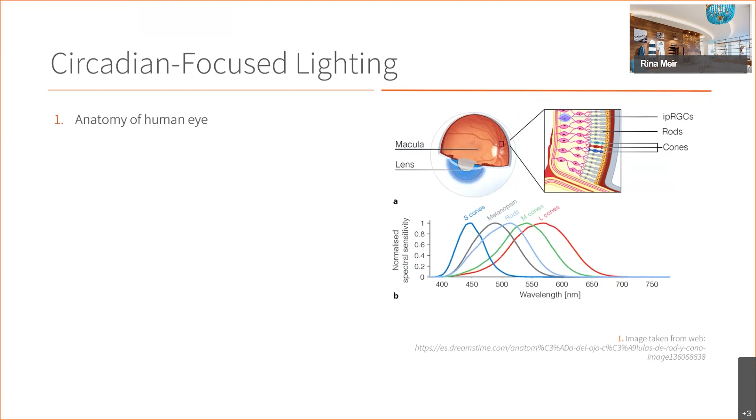They're found to be responsible for entrainment of circadian rhythm lighting.

The non-visual photoreceptors in our eye are more sensitive to specific wavelengths on the blue side of the visible spectrum. The blue turquoise light, essentially 456 to 490 nanometers, is more efficient to regulate circadian rhythm lighting. Blue-violet light, which is 415 to 455, medical researchers show that blue turquoise light may be less damaging than blue-violet light, which brings on age-related macular degeneration and digital eye strain.

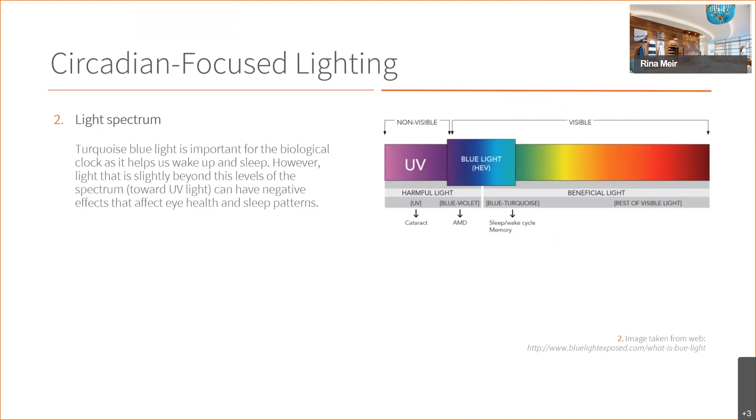So, flicker. Flicker is one of the most common problems we encounter nowadays, specifically due to the LED era. I'm sure you've all seen flicker-related situations in the past, and it's a big problem that depends on a wide variety of factors.

Generally, the three main ones to be considered are the power supply and the quality of the power supply, the compatibility of the fixture with the driver or power supply, and the compatibility with additional accessories like heat sinks and whatnot.

It's important to touch base on a key flicker factor: the power we get from an outlet, which is AC, or alternating current, with an incandescent source. The resistance of the filament made it almost impossible to notice flicker in the past. It sort of acted as a buffer.

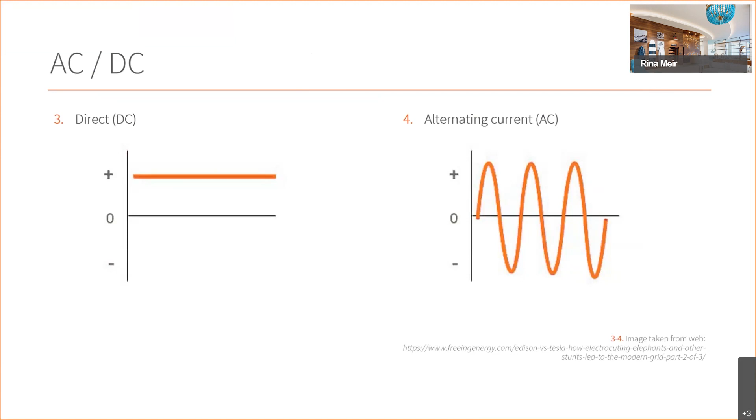So this is the age-old conversation about direct current versus alternating current, low voltage versus line voltage. Do I want ease of install, or do I want perfect dimming? Or not just perfect dimming, but a flicker-free environment under every circumstance? This is the obvious question lighting designers have to think about when designing spaces for any application.

Some of the most common health-related problems with flicker, which are minor but become very annoying, are headaches, eye strain, and fatigue. The question is how to know when there's flicker, and the answer is: anything blinking over 100 hertz our eye will not perceive as flicker, while standards accept up to 90 hertz.

The banding effect occurs when the light source turning on or off is in synchrony with the frame rate of your camera. But there's a trick: you need to know the frequency of your camera taking photographs, or the video frame rate. The most practical test is to flick something like a ruler in front of the light source. If you see a strobing effect, the flicker is probably below 100 hertz and will be visible. On the other hand, if you see the object move without the strobe effect, the light source is probably flicker-free.

Some of the health effects associated with this: there's the obvious stuff, like blurred vision and eye strain. It's not that big of a deal in most circumstances, but it's very annoying. It can become very dangerous in a driving situation. Headaches, migraines, fatigue, and reduced visual task performance can also be quite serious.

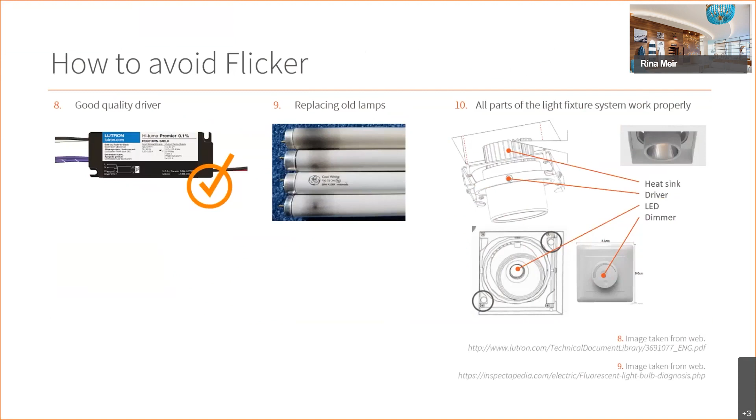Now we're moving on to different ratings—this is how glare is measured. There are essentially 2 different terminologies: one is called VCP, or Visual Comfort Probability, and the other is UGR, Unified Glare Rating. Because we're American, we always like to have our own ratings.

VCP is generally used in the United States, but if you're looking at specifications for lighting products that are global brands, you'll find the UGR rating instead. These are just 2 different rating systems, but they tell the same story. If you Google VCP to UGR, you can find how to decipher between the two—you can take the value of a product in VCP and translate it to UGR and vice versa. The one I think is probably most important is the Unified Glare Rating.

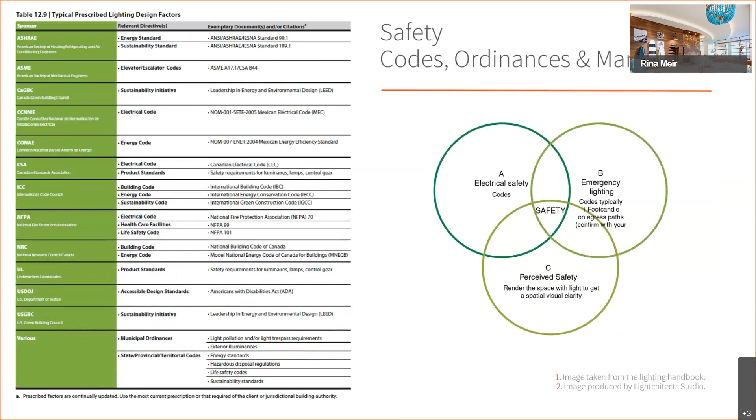The IES handbook provides lighting recommendations. There's also ASHRAE, IES, and you also have to consider your local, regional, and federal codes as well.

But they all are important. What is IES again? IES is International Electrical Standards, I believe. Oh no, sorry, I take that back. It's Illuminating Engineering Society. If you want, I can show you, I have all their books here. But they're massive, it's like a 5,000 page giant book that they give out, I think every year it comes out.

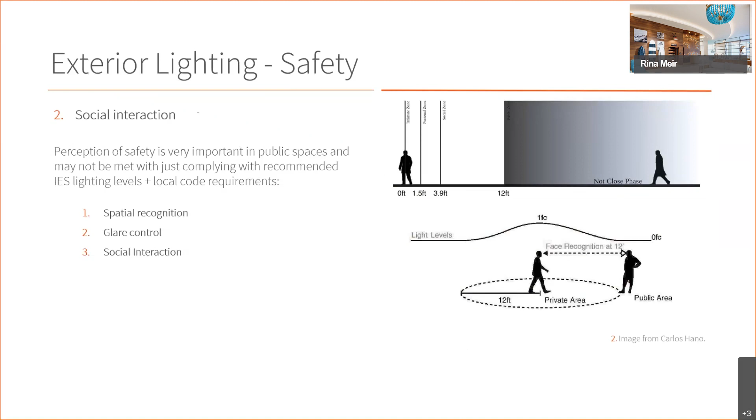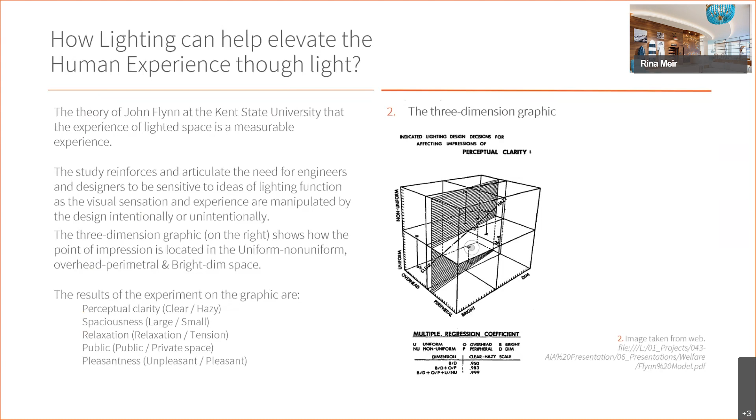There's a theory from John Flynn at Kent State University that experience of lighted spaces is a measurable experience. This study reinforces the need for engineers and designers to be sensitive to lighting functions, as the visual sensation and experiences are manipulated by the design, intentionally or unintentionally. The three-dimensional graphic shows how the point of impression is located in uniform, non-uniform, overhead, perimeter, and bright, dim spaces.

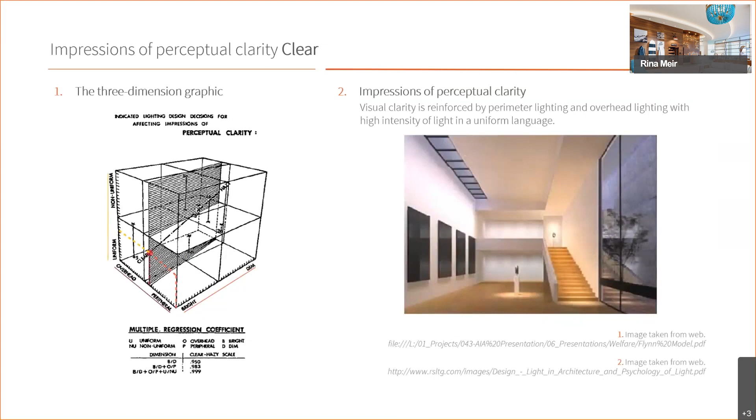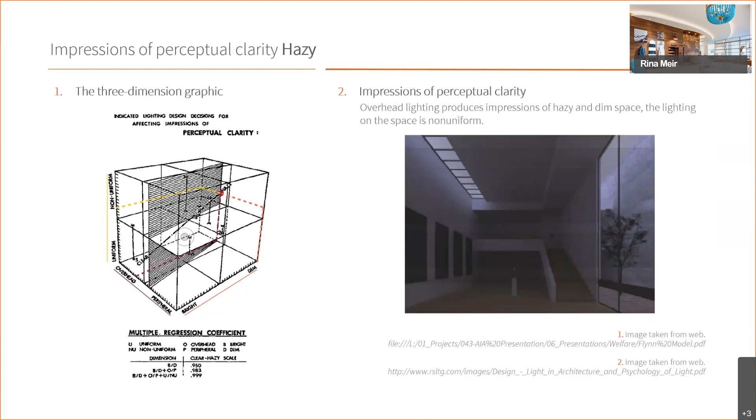Then you've got the next, which is hazy, which is again the perception of the space achieved by non-uniform lighting, mostly overhead, and it's dim, and it's rendered hard to sort of understand what we're looking at.

Then you've got the creation of a larger space, which we talked about a little earlier, essentially lighting one of the back walls, which gives you the feeling that the space is much larger. It's mostly bright and mostly uniform.

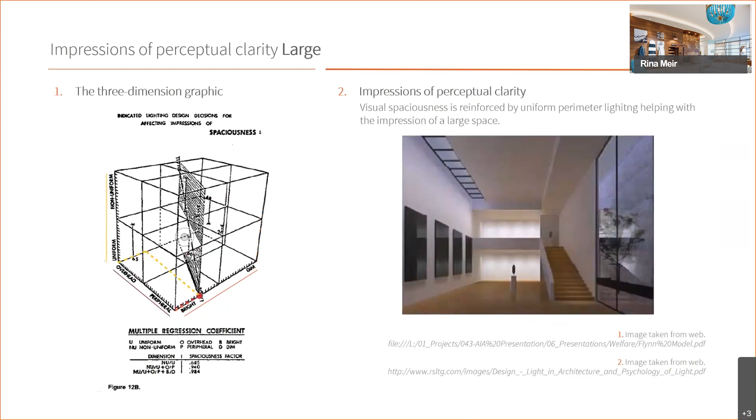And then this is a small space, so now you're creating the feeling of a small space: non-uniform lighting, overhead lighting, mostly dim, high contrast, lack of illumination. This is what we call theatrical lighting, where you've got a very high contrast of your dark to your light.

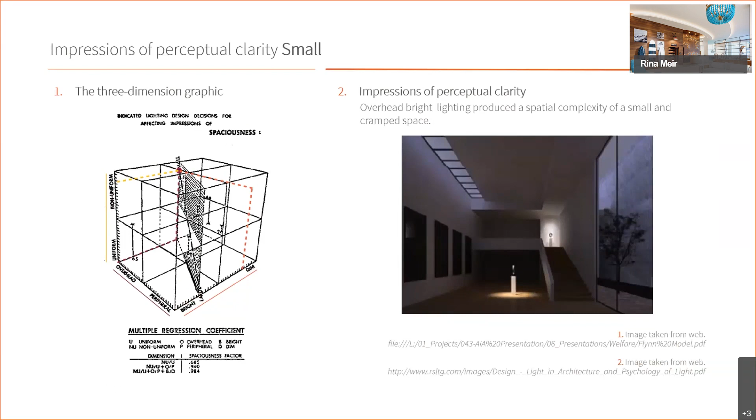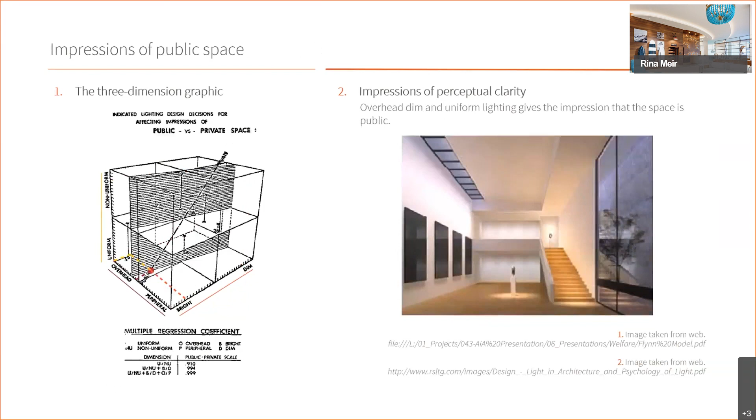And then this is your public space, which is essentially mostly uniform ambient lighting, overhead, peripheral lighting, mostly bright. And then we're on to the last, which is your private space, which is non-uniform lighting, mostly overhead lighting, dim light levels.

How to light? The lighting design can achieve the desired ambiance or lighting intention by using a couple of different techniques, and this is applicable for any application. Different lighting strategies, essentially what we just talked about, which is peripheral lighting versus overhead lighting versus that theatrical effect versus some general ambient lighting.

Color temperatures have their place in each application. Hospitals are generally going to be your 3500 to 4000K. Dining lighting is usually about 2700K, etc.

And then how to incorporate daylight strategies as well, like daylight harvesting and whatnot. And then selecting the correct beam angles for what you're trying to achieve. So if we're trying to light a piece of art on a wall, we want the correct beam angle for that and not light the entire space. We want to create a theatrical effect.

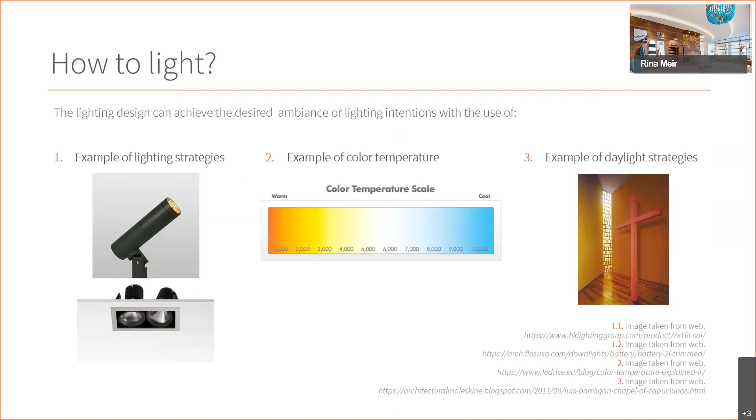So as part of lighting design, you may pick a fixed color temperature, dynamic white, or warm dim technology. There are 3 different aspects here. One of the most popular is, of course, choosing the right color temperature for your application. But a lot of the time we want to do either a warm dim or tunable white.

Warm dim is essentially one of the most popular that we see for residential and also for dining and restaurants. It essentially mimics that incandescent effect of 2700K, and then as you dim it down, it goes down to 1800K. This is done by multiple LEDs in the point source with different CCTs, and the control system essentially allows you to dim it down, and as it dims, it warms.

Tunable white is that same concept, it's just that you have a wider range of color temperature, and you can dial in your color and your output. So essentially, you're not mimicking an incandescent, but you're using the right white lighting for the task.

So for instance, if we're cleaning, I want to turn it on to 6000K so I can see all the surfaces as bright as possible, and then maybe warm it down for dining down to 2700K, etc. So you have a lot of different options using different LEDs and control systems for warm dim, tunable white, and static white options for just standard dimming on static white.

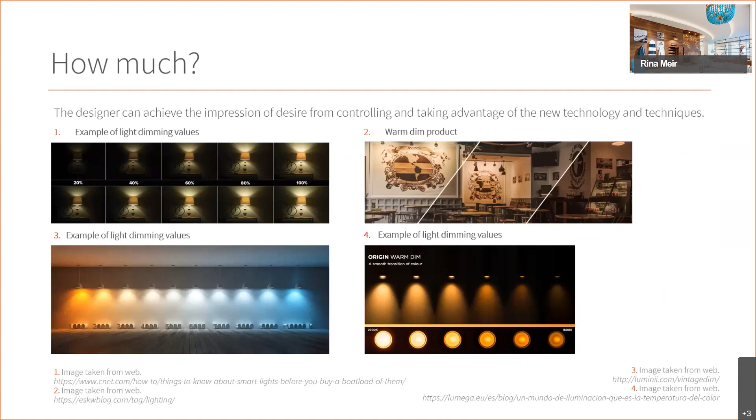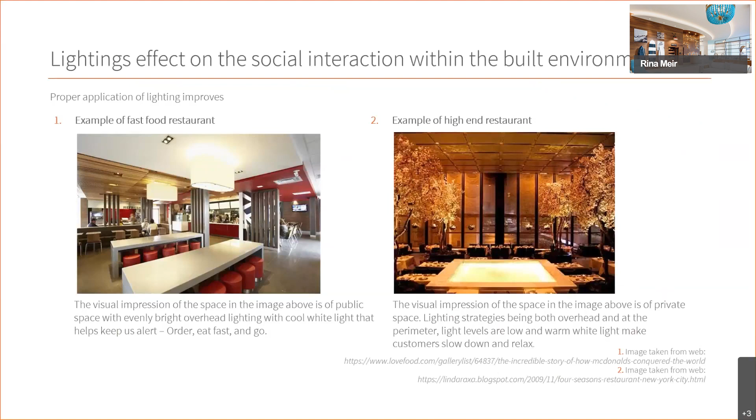The next one on the far right is an example of a high-end restaurant in which there's sort of pockets of light, layers of light. It's much warmer, it's mimicking almost an incandescent feel, and it's meant to slow you down and relax you. So it's essentially two different lighting schemes to achieve two very different things.

So this is not just a problem in terms of wanting to see stars. It's actually an overall problem that disrupts plant growth. It disrupts the quality and the life of land and sea animals, migrating birds, sea turtles, etc. And it also can cause accidents on the road and whatnot. So it has a lot of very bad effects on top of wasted energy, which is another major issue.

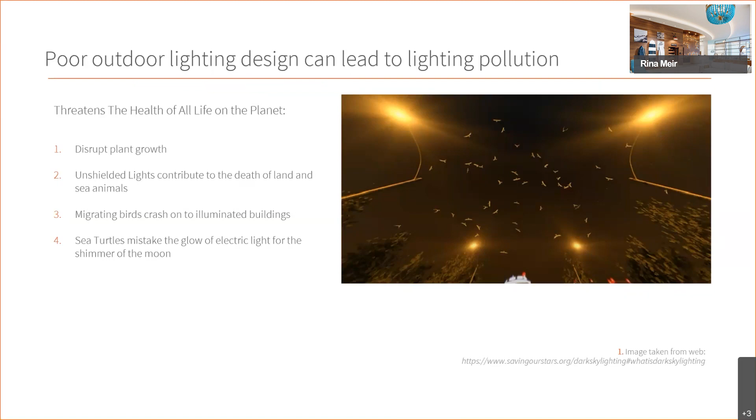Okay. Oh, wait. Okay.

Bright light also affects humans, and this is really important. Glare from poorly designed light fixtures causes accidents, as I said before, and it also disrupts our circadian rhythm and sleep patterns. In areas with a lot of light pollution, it's also known to cause more cancers, specifically endocrine cancers such as breast, ovarian, and prostate cancer. So it's a very serious problem.

Poor outdoor lighting can lead to light pollution, and there are a couple different scales of lighting for exteriors. One is the Bortle scale, which I wasn't familiar with, but anyone doing facade lighting has to be aware of what codes their city aims for. A major city is never going to aim for a 1, but they can't be at an 8 or 9, so it's important to be aware of that.

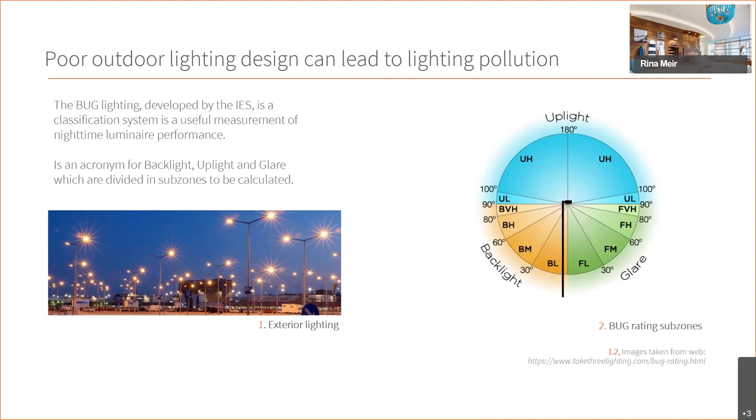One piece of good news about light pollution, unlike air pollution, is that it's reversible, and we can fix this.

So what can we do? We need to use light fixtures that have shields, like we talked about, and optics. When possible, try to automate the lighting so there are motion sensors. Use lighting where and when it's needed, not where it's not needed, and use blinds to keep light inside, not outside.

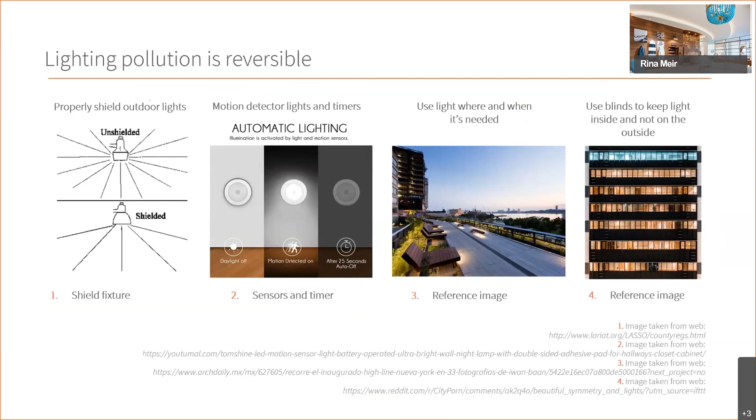As we've come to learn, artificial lighting has its impact on wildlife, like I talked about before. For example, turtles suffer from alterations due to artificial lighting or built environments. Some codes, such as Florida Fish and Wildlife Conservation, include them in the restrictions and guidelines, and there are quite a few guidelines related to turtle lighting.

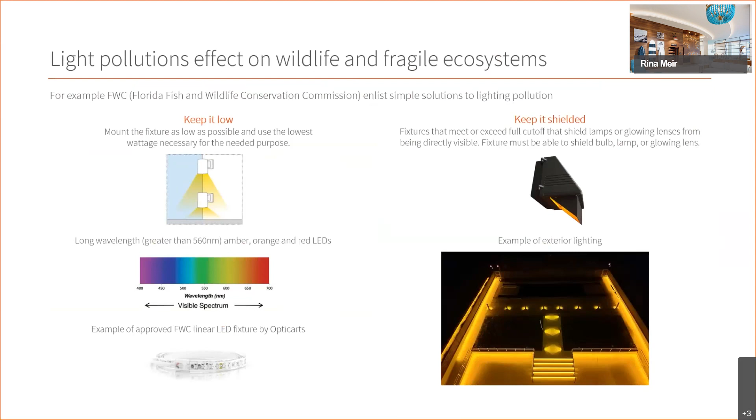So if you're ever driving along the coast, you'll see amber lighting quite often, and it's quite low, almost too dark. That's on purpose, and it has to do with keeping the wavelengths long, shielding your light, and keeping it low.

Overall, we're looking at a glare-free environment with warm white lighting. Ideally, all the lighting would have warm dim technology to allow certain moments where you really get low candlelight, warm light effects.

On the next slides, we're going to analyze the different strategies and layers of light in the space. In this slide, you'll see we're using linear lighting to light this bookshelf.

You can see the light sources are hidden, so essentially you're seeing the effect, not the source, which is ideally the goal with most linear lighting, unless it's direct view for different applications.

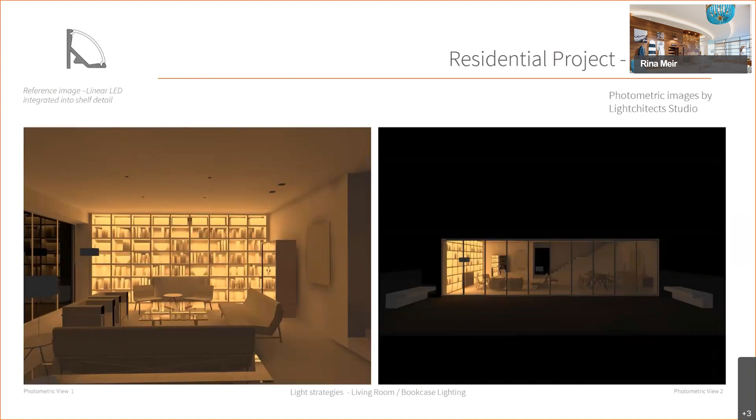We've got downlights in the living room generating a nice pool of light on the horizontal plane. Notice how the light source is deep into the fixture, with faceted reflectors to avoid glare.

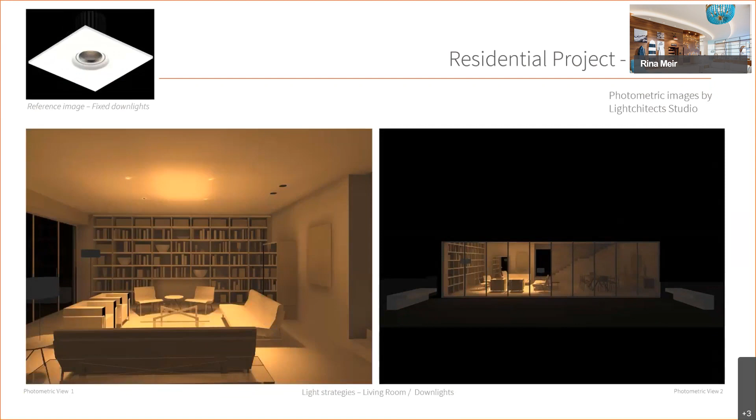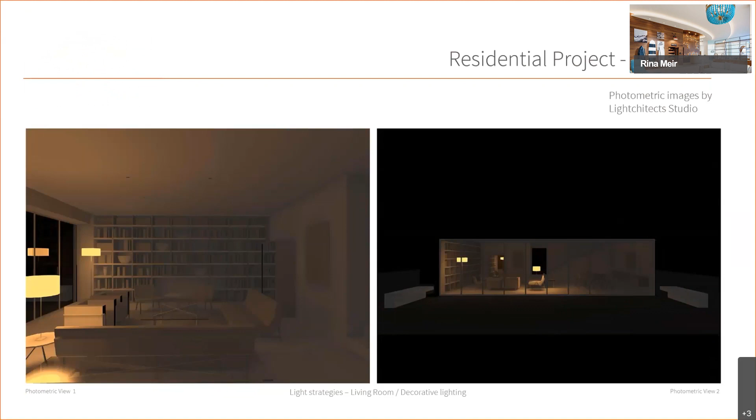And then you've got decorative table lighting and floor lamps to provide a light fill that contributes to the space, like a soft omnidirectional lighting in this space.

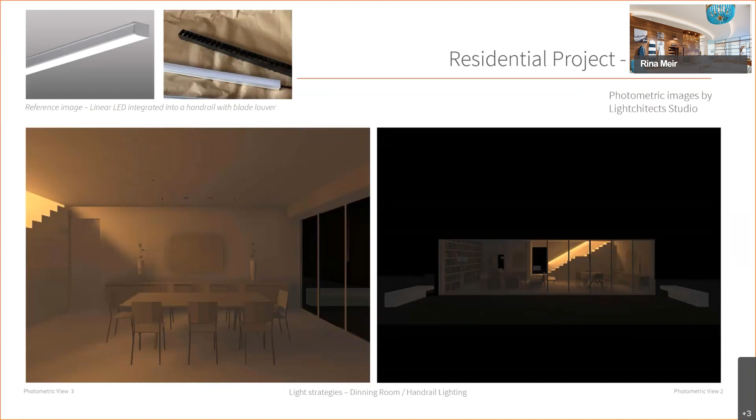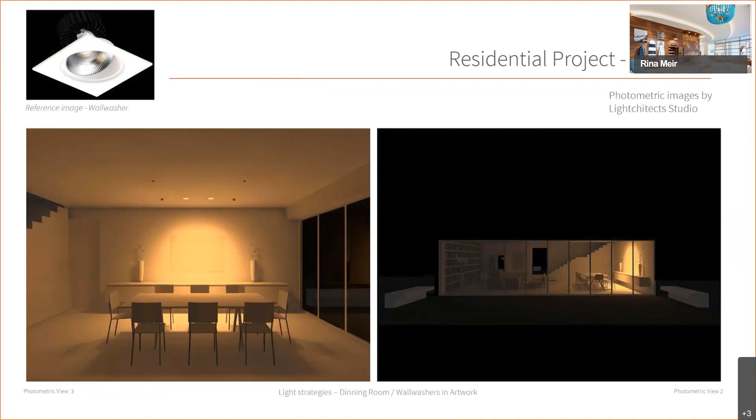And again, accent lighting for artwork that we talked about earlier. Notice again the faceted reflectors to avoid glare. And then accent lighting for the floral display.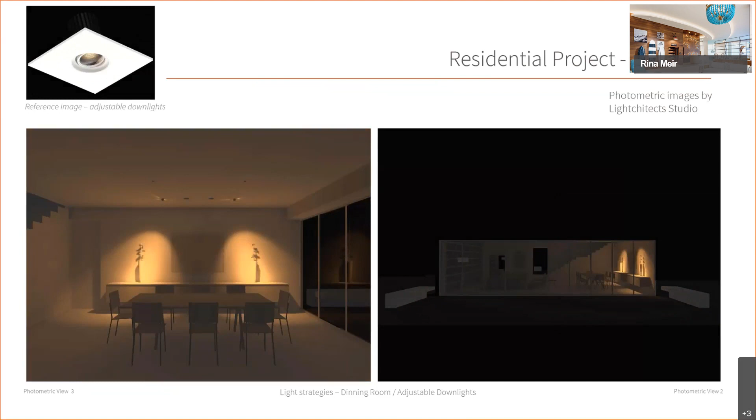And now that we understand the logic behind the lighting, we can see the whole lighting scheme turned on. These layers of light will work in conjunction with the lighting controls and would allow us to create light scenes and levels for specific activities like working, dining, strolling in our garden, etc.

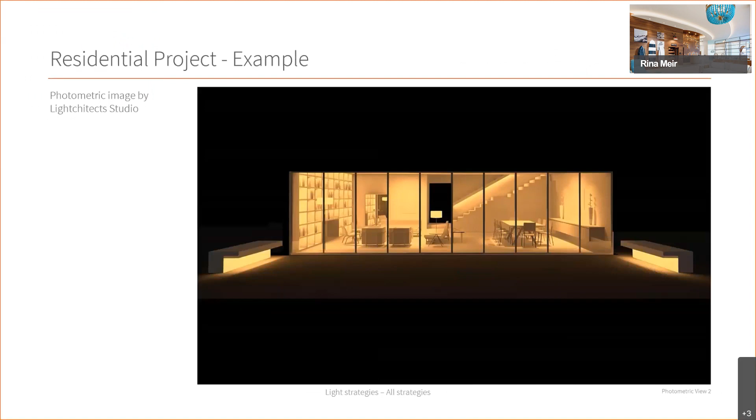You can see the living room is all on, and you can see the dining room is all on, and you can see the outdoor view all on.

And that is it. Thank you so much. Wow, that was fascinating. Actually, so glad that we had time to go through this again because it was definitely missing some of the detail.

I want to back up to some of the earlier things that you mentioned, Rina. DC versus AC. I think I grasped the idea that we have a 60 cycle alternating current, and when we're on the forward phase and the reverse phase, you can be without current, so it flashes and can give a strobe effect. I think Shannon's theorem is the electrical engineering theorem that describes the same phenomena. But what I don't understand is, all LEDs are DC by nature, right?

So you have a transformer that is converting AC to DC in 100% of the cases? No. You are starting to make a point about DC being a cleaner dimming because you don't have the lack of power during the 60 cycle crossing the 0 point. But if you're going through a transformer and everything is DC at the end of the day, what does that mean in a practical sense to an installer?

So a lot of fixtures, like specifically linear, a lot of fixtures are actually now considered line voltage, so it's direct AC into the fixture. There's a lot of modules now, like LED light modules, that are designed as direct AC. The purpose behind that is it's an easier install. It's a lot less expensive and it's an easier install. And it's actually very typical in applications like linear, where you've got long runs.